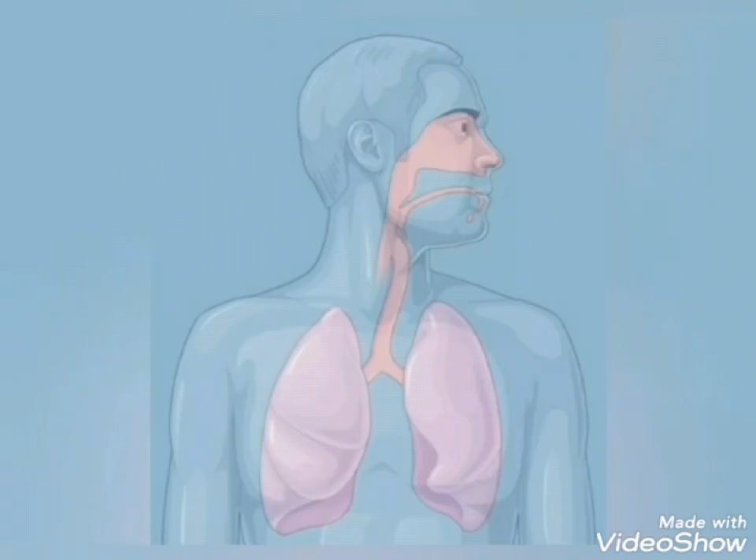So, what is COVID-19? It is caused by a virus that can be passed from person to person. It first appeared in public in December 2019 and has quickly spread around the world. It mainly affects our respiratory system. The major signs of being sick with COVID-19 are fever, cough, body aches, and trouble breathing.

Now let's talk about the practical steps you can take to keep yourself safe. Wash hands for about 20 seconds frequently. Keep social distancing of at least 6 feet. Wear a mask. Avoid crowds. Avoid handshaking. Avoid touching your face area, especially eyes, nose and mouth.

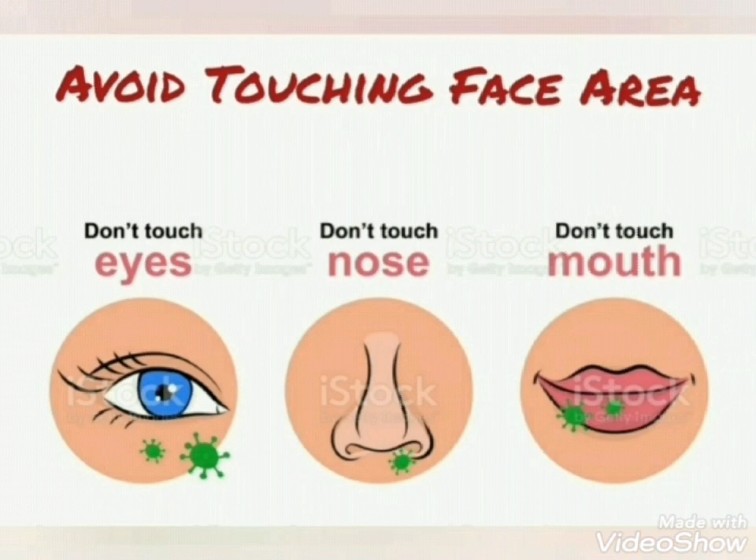Now we'll directly go to our main topic, processing of municipal solid waste. This study represents a few steps of municipal solid waste management. Municipal solid waste is defined as waste collected by the municipality or disposed at the municipal waste disposal site. Organic materials like food and vegetables continue to be the largest component of municipal solid waste. Rock, dirt and other miscellaneous waste make up the lowest amount of it.

The world generates 2.01 billion tons of municipal solid waste annually. Worldwide, waste generated per person per day averages 0.74 kg. Waste generation in Bangladesh is around 22.4 million per year. Waste generation in Bangladesh is projected to reach 47,064 tons per day by 2025.

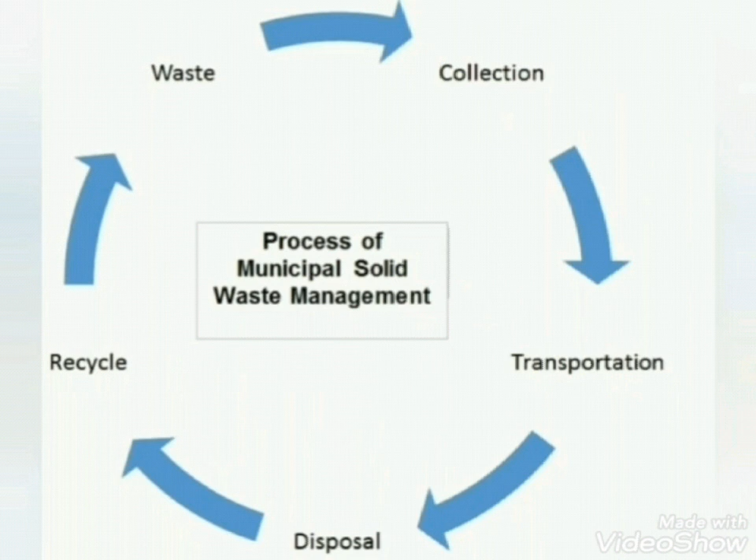Processing of municipal solid waste here. Paper waste is stored in a blue jar, glass waste in green, plastic waste in yellow, and metal waste in a red jar. Municipalities or agencies and companies appointed by municipalities collect and transport waste from the source to processing or landfill disposal sites. And finally recycle, reuse, recover.

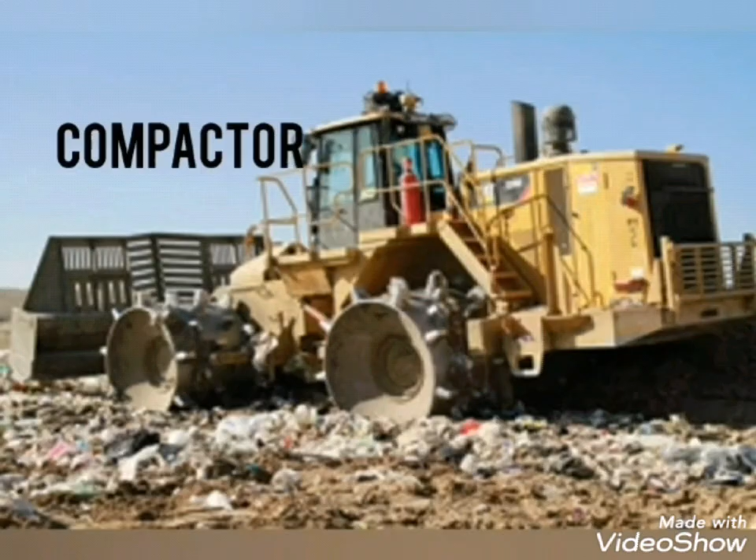Conveyors move material from one portion of the facility to another. A belt conveyor is one of the carrying or transporting mechanisms of a recycling or waste management system. Compacting is the process of compressing waste, reducing it in size. A compactor is a machine or mechanism used to reduce the size of waste material through compaction.

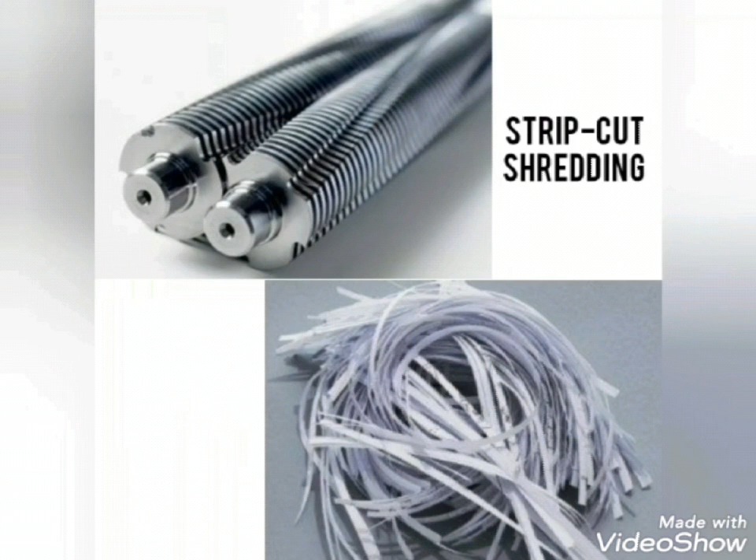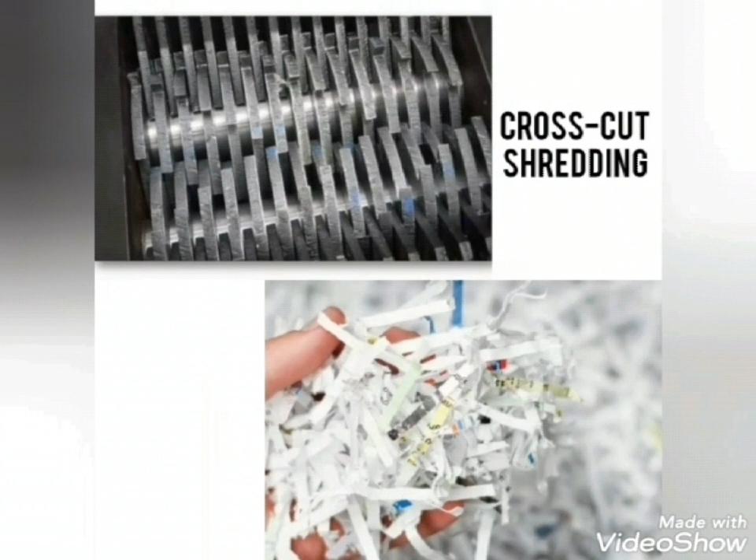Size reduction is required for processing of many solid waste materials. Shredding is one form of size reduction. Other such processes are cutting, shearing, grinding. Among various shredders, a strip-cut shredder uses a rotating blade to cut paper into long strips. Cross-cut shredders use a specially designed blade to slice paper into small squares or diamond shapes.

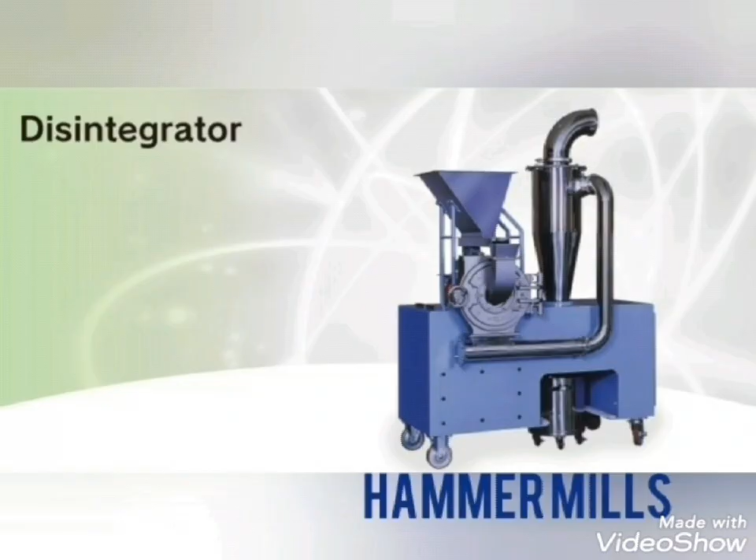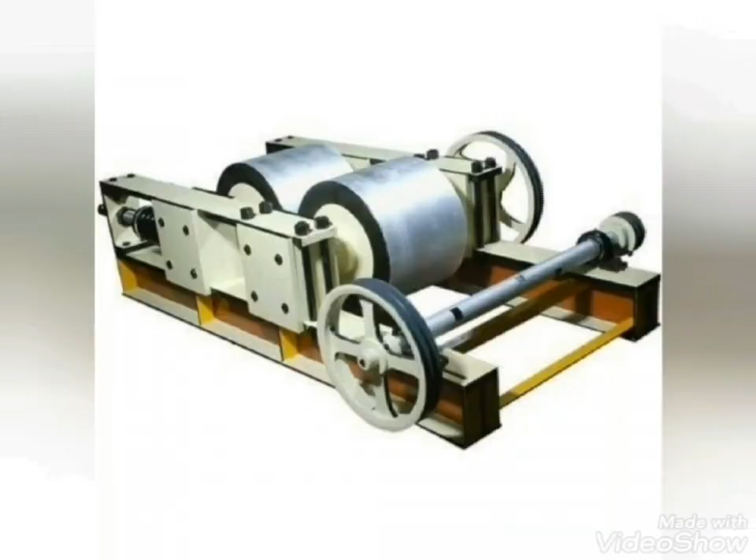A microcut shredder reduces paper waste into very small particles. A rotating hammer pulverizes the paper in 3 seconds. A disintegrator is a heavy-duty shredding machine that uses multiple blades to shred waste. Paper, cardboard, wood are crushed until soft, smooth and wet by the process of pulping. Crushing reduces the volume of waste for the reasons of optimizing transport cost or saving space in landfills. Granulation is the act of forming or crystallizing waste into grains.

Waste is separated into different elements. Separation is used to permit more efficient processing of waste components. To separate waste, picking refers to the collection, sorting and reusing of waste material recovered by collectors who are not recognized by municipalities. In material separation, screeners are used for achieving efficient separation of particles through the differences between particle sizes with respect to any two dimensions.

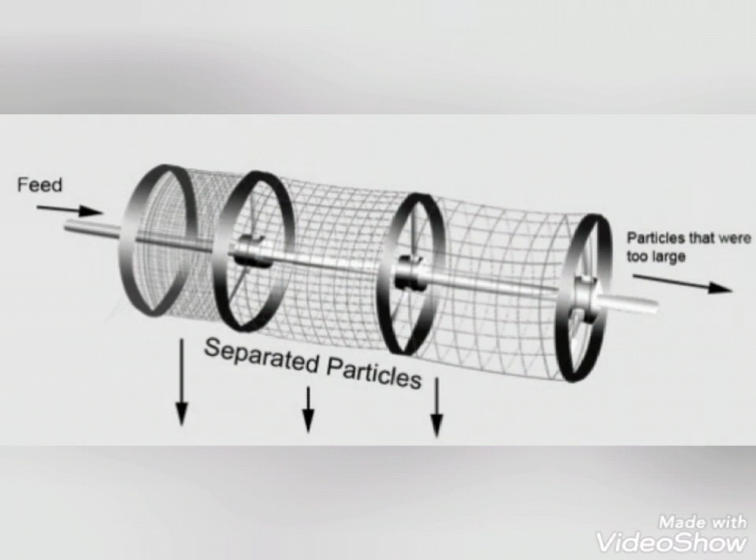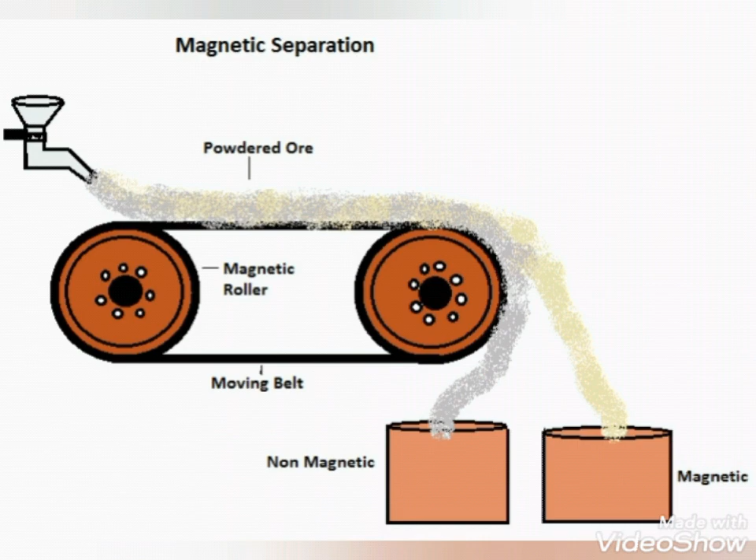Magnetic separation is used especially for separating magnetic impurities from non-magnetic particles. The powdered ores are made to fall from a hopper onto a belt moving over an electromagnetic roller. Combustion of municipal solid waste. Combustion or thermal treatment is the act of burning as a means of treating and disposing of hazardous waste, and it can significantly reduce mass and volume.

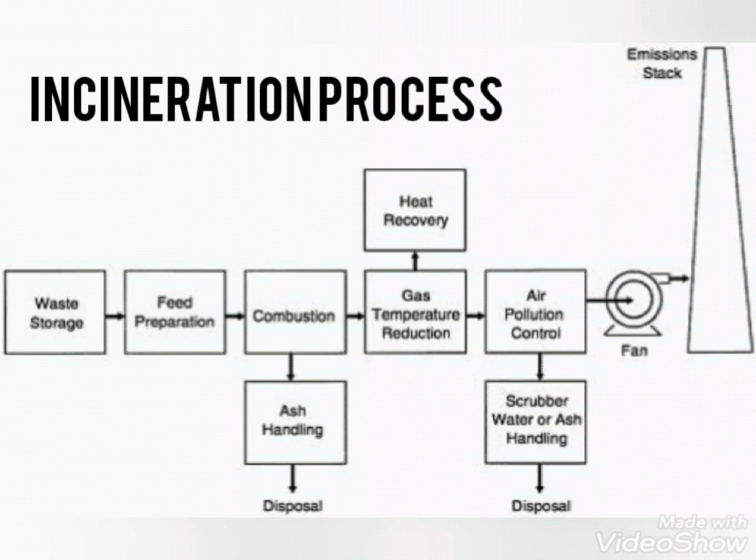Incineration is a category of combustion units. Waste incineration is one of many societal applications of combustion. Generally, waste incineration facilities include waste storage and feed preparation. Combustion in a furnace produces hot gases and ash for disposal. Gas temperature reduction involves heat recovery through steam generation. To remove air pollutants, it contains treatment of the cold gas and disposal of residuals, and finally dispersion of the treated gas to the atmosphere through an induced draft fan and stack.

The most common incinerator, the mass burn incinerator, is not a new idea, but with increasing knowledge this process has developed and become the method of choice of many waste management companies and municipalities. Another method is gasification. Gasification is a technology that converts carbon-containing waste materials into synthetic gas by chemical reaction, which in turn can be used to produce electricity.

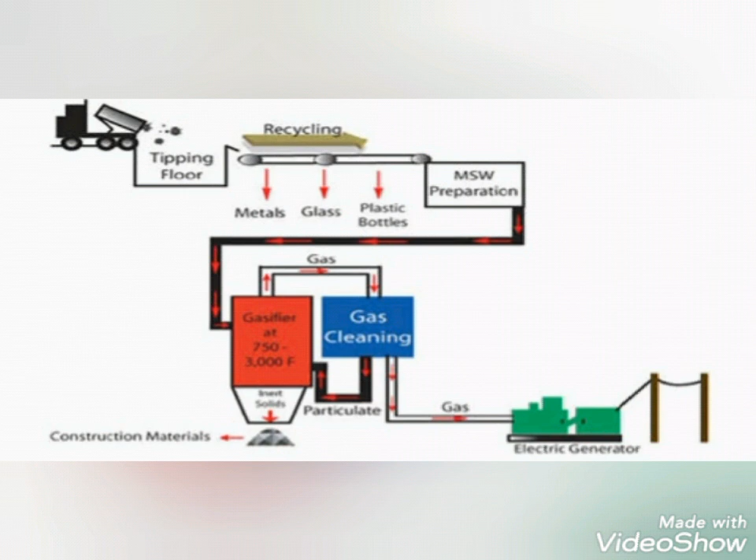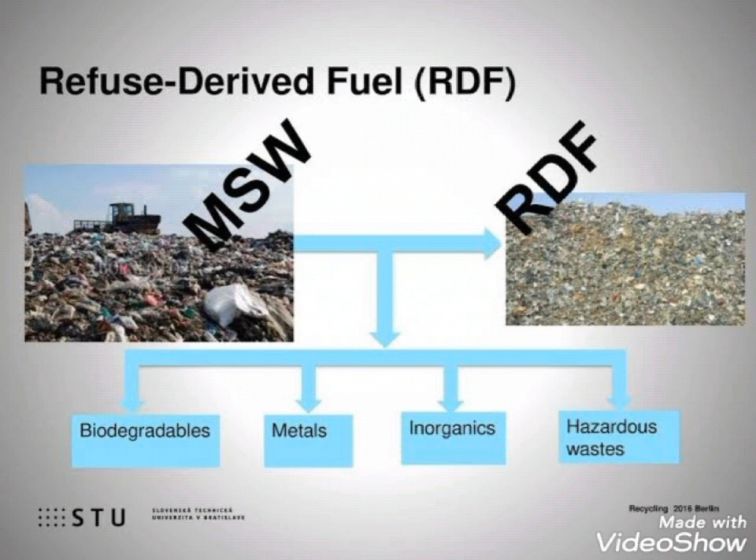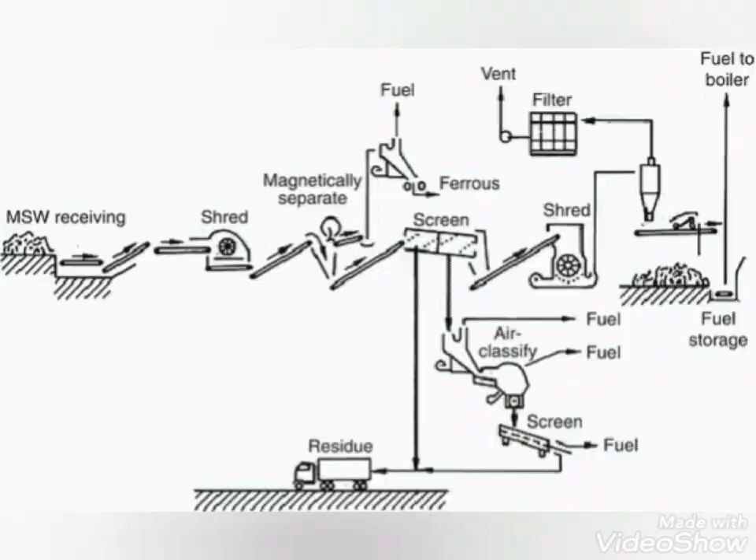Refuse-derived fuel systems use mechanical methods to shred incoming municipal solid waste and separate out non-combustible materials. In this system, a combustible mixture is produced that is suitable as a fuel in a dedicated furnace or as a supplemental fuel in a conventional boiler system. It is important to view waste as a valuable source. Waste to energy is the example to prove it.

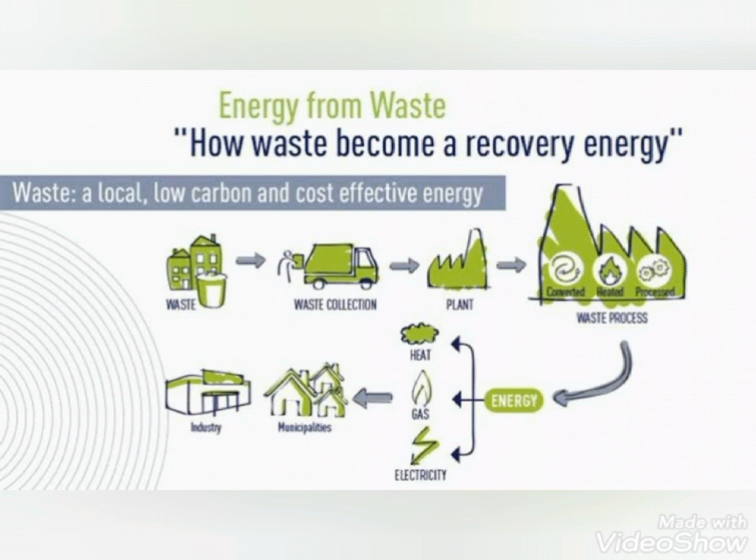Energy recovery from waste is the conversion of non-recyclable waste materials into usable heat, electricity, or fuel. This process generates a renewable energy source, reduces carbon emissions by offsetting the need for energy from fossil sources, and reduces methane generation from landfills. This process of converting waste to energy can be viewed as a process of generating wealth. So, we can say strongly, wastes are not actually waste, wastes are wealth.